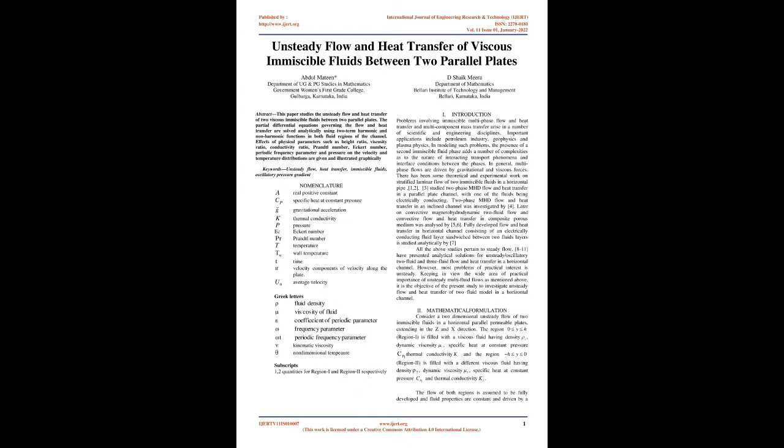In general, multiphase flows are driven by gravitational and viscous forces. There has been some theoretical and experimental work on stratified laminar flow of two immiscible fluids in a horizontal pipe 1,2. 3 studied two-phase MHD flow and heat transfer in a parallel plate channel, with one of the fluids being electrically conducting. Two-phase MHD flow and heat transfer in an inclined channel was investigated by 4. Later on, convective magnetohydrodynamic two-fluid flow and convective flow and heat transfer in composite porous medium was analyzed by 5,6.

Fully developed flow and heat transfer in horizontal channel consisting of an electrically conducting fluid layer sandwiched between two fluid layers is studied analytically by 7. All the above studies pertain to steady flow. 8 to 11 have presented analytical solutions for unsteady/oscillatory two-fluid and three-fluid flow and heat transfer in a horizontal channel. However, most problems of practical interest are unsteady. Keeping in view the wide area of practical importance of unsteady multi-fluid flows as mentioned above, it is the objective of the present study to investigate unsteady flow and heat transfer of two-fluid model in a horizontal channel.

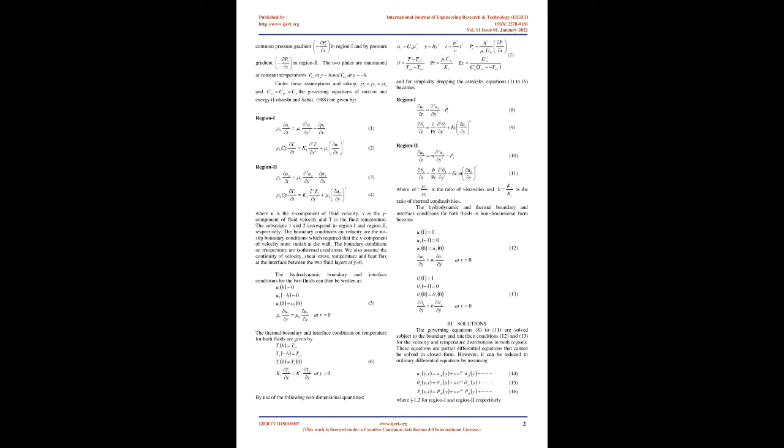2. Mathematical formulation. Consider a two-dimensional unsteady flow of two immiscible fluids in horizontal parallel permeable plates, extending in the z and x direction. The region I is filled with a viscous fluid having density, dynamic viscosity, specific heat at constant pressure, thermal conductivity, and the region II is filled with a different viscous fluid having density, dynamic viscosity, specific heat at constant pressure and thermal conductivity. The flow of both regions is assumed to be fully developed and fluid properties are constant and driven by a common pressure gradient in region I and by pressure gradient in region II. The two plates are maintained at constant temperatures.

Under these assumptions, the governing equations of motion and energy, Lohrasbi and Sahai, 1988, are given by, where U is the x component of fluid velocity, V is the y component of fluid velocity and T is the fluid temperature. The subscripts 1 and 2 correspond to region I and region II, respectively. The boundary conditions on velocity are the no-slip boundary conditions which require that the x component of velocity must vanish at the wall. The boundary conditions on temperature are isothermal conditions.

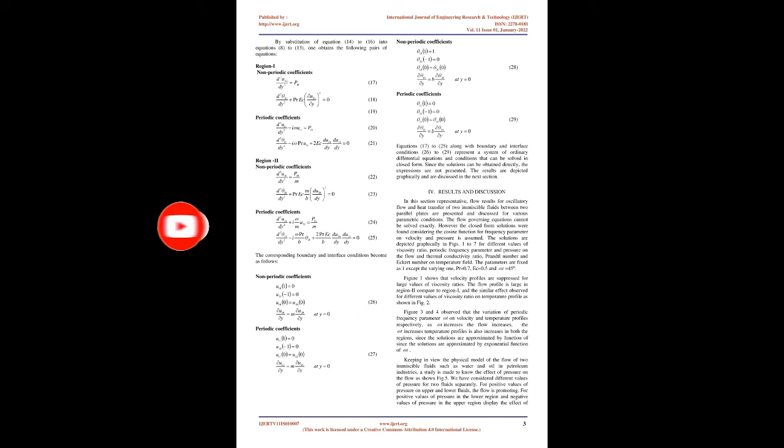We also assume the continuity of velocity, shear stress, temperature, and heat flux at the interface between the two fluid layers at y=0. The hydrodynamic boundary and interface conditions for the two fluids can then be written as 5. The thermal boundary and interface conditions on temperature for both fluids are given by 6. By use of the following non-dimensional quantities, 7, and for simplicity dropping the asterisks, equations 1 to 6 become region I 8, 9, region II 10, 11, where is the ratio of viscosities and is the ratio of thermal conductivities.

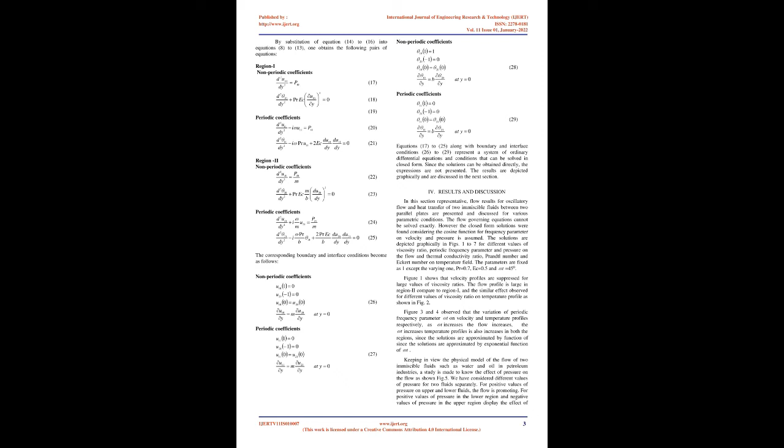The hydrodynamic and thermal boundary and interface conditions for both fluids in non-dimensional form become 12, 13. 3. Solutions. The governing equations, 8 to 11, are solved subject to the boundary and interface conditions, 12 and 13, for the velocity and temperature distributions in both regions. These equations are partial differential equations that cannot be solved in closed form.

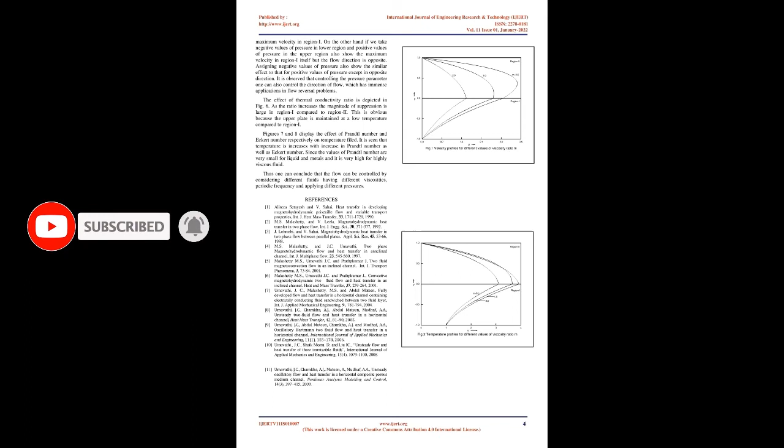However, they can be reduced to ordinary differential equations by assuming 14, 15, 16, where j = 1, 2 for region I and region 2 respectively. By substitution of equations 14 to 16 into equations 8 to 13, one obtains the following pairs of equations. Equations 17 to 25, along with boundary and interface conditions 26 to 29, represent a system of ordinary differential equations and conditions that can be solved in closed form. Since the solutions can be obtained directly, the expressions are not presented. The results are depicted graphically and are discussed in the next section.

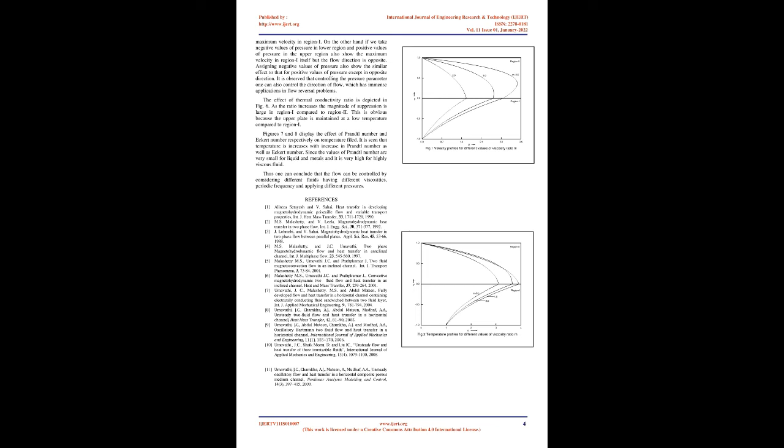4. Results and discussion. In this section, representative flow results for oscillatory flow and heat transfer of two immiscible fluids between two parallel plates are presented and discussed for various parametric conditions. The flow governing equations cannot be solved exactly. However, the closed-form solutions were found considering the cosine function for frequency parameter on velocity and pressure is assumed.

The solutions are depicted graphically in Figs 1 to 7 for different values of viscosity ratio, periodic frequency parameter and pressure on the flow, and thermal conductivity ratio, Prandtl number, and Eckert number on temperature field. The parameters are fixed as 1 except the varying one, Pr equals 0.7, Ec equals 0.5 and ωt equals 45 degrees. Figure 1 shows that velocity profiles are suppressed for large values of viscosity ratios. The flow profile is large in region 2 compared to region I, and a similar effect is observed for different values of viscosity ratio on temperature profile as shown in Fig 2.

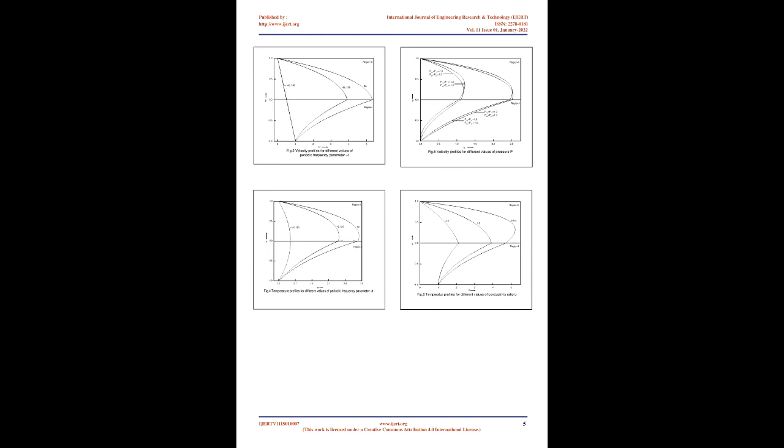Figures 3 and 4 show the variation of periodic frequency parameter on velocity and temperature profiles respectively. As it increases the flow increases, and the temperature profile also increases in both the regions, since the solutions are approximated by an exponential function. Keeping in view the physical model of the flow of two immiscible fluids such as water and oil in petroleum industries, a study is made to know the effect of pressure on the flow as shown in Fig. 5. We have considered different values of pressure for two fluids separately.

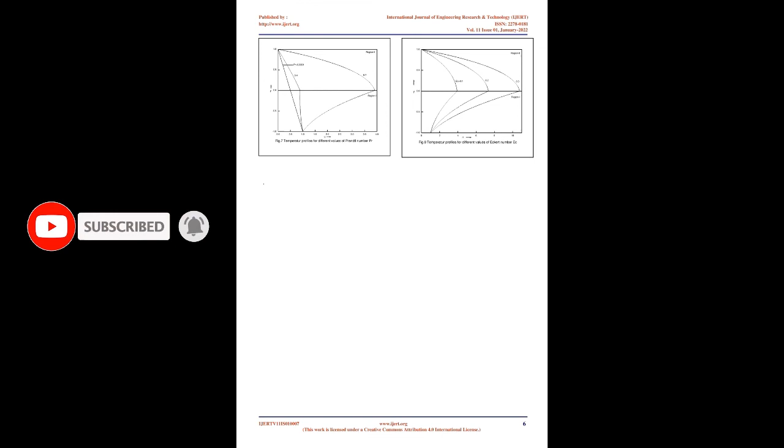For positive values of pressure on upper and lower fluids, the flow is promoting. Positive values of pressure in the lower region and negative values of pressure in the upper region display the effect of maximum velocity in region I. On the other hand, negative values of pressure in the lower region and positive values in the upper region also show the maximum velocity in region I itself, but the flow direction is opposite. Assigning negative values of pressure also shows a similar effect to that for positive values except in opposite direction. It is observed that by controlling the pressure parameter one can also control the direction of flow, which has immense applications in flow reversal problems.